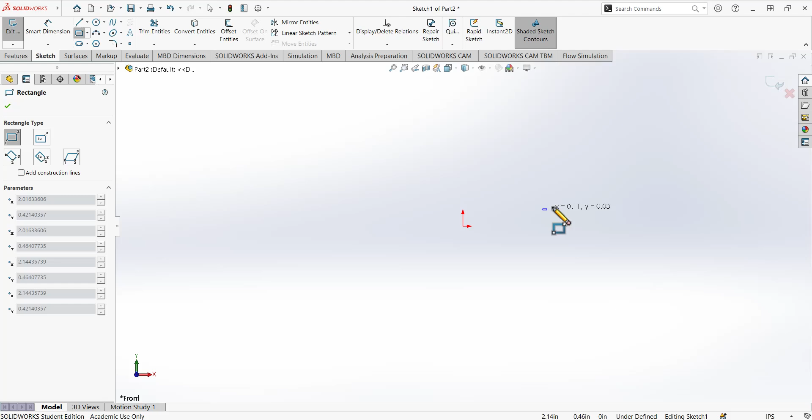First point here using right click, second point here like that, then click. Nothing is selected, so we have to add a relation. For this, I select this origin point and this line, then add the relation so it's at the midpoint. Now this origin and this line are in midpoint.

Next we add the dimension using the smart dimension tool. For this line we have a dimension of 5 inches, and for this vertical line we have a dimension of 0.5 inches. So this sketch is complete and fully defined.

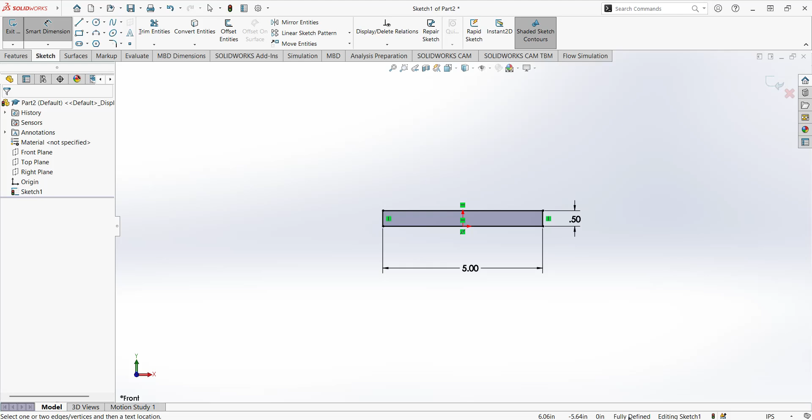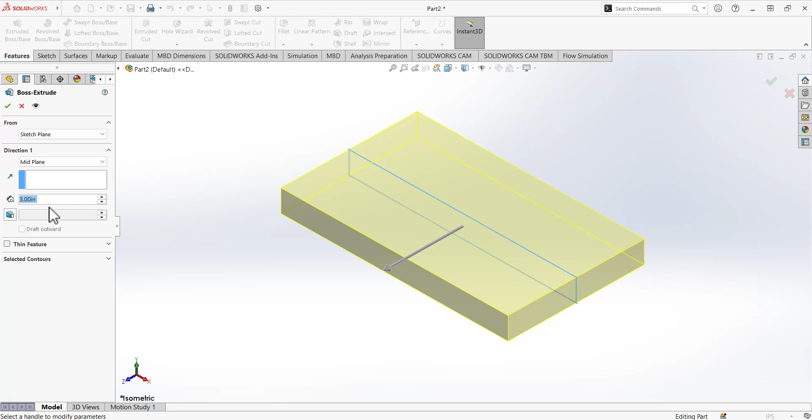Next, exit this sketch, go to isometric view, then go to features and extrude. Under the second setting, for direction one we select mid plane, and this depth of the sketch will be 3 inches. Now you can see we selected mid plane, so half of the material is added in one direction and half in the other. Total it's 3 inches.

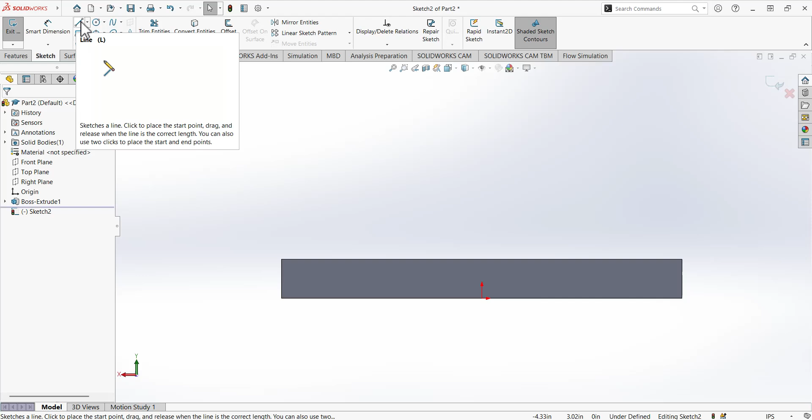Next we open another sketch, and for this sketch we select this face. Use the middle mouse button to rotate it and select this plane. Now for this sketch, select the line tool and draw a line from here to here, then move your cursor like that, then like that.

Then we draw a center line, like that, and move this point till this point. We are basically adding the half sketch like that. For this line, we can also just drag it and place it till this point. We add the half sketch and then use mirror.

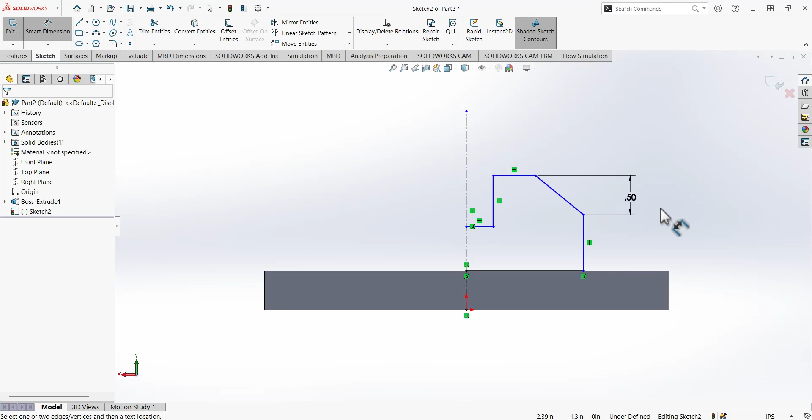For the smart dimension tool, we put the dimension. From here to here, this dimension is 0.5. Then we add the angular dimension. The angle between this line and this one is 30 degrees.

Next, from this point to this point in the drawing, the whole dimension is given as 3.25, but since we're adding the half, we divide it by 2, so it will be 1.625. From this point to this point, the full dimension is 0.25. Next, this dimension we put as 0.5.

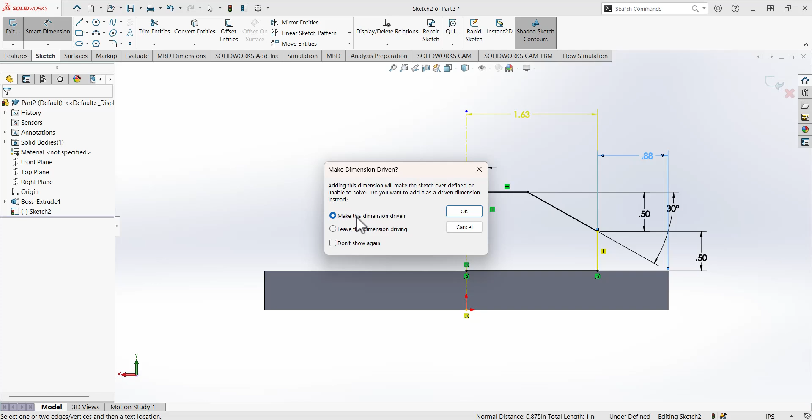Next we have to see which dimension is missing. One thing from this point to this point - it's over-defining our sketch, so we don't need that dimension, just cancel it.

Next we see the depth for this one, which should also be 0.5. We can add a relation between this point and this point, or add a dimension like that, and it's 0.5. Now our sketch is fully defined, we don't need any further dimensions.

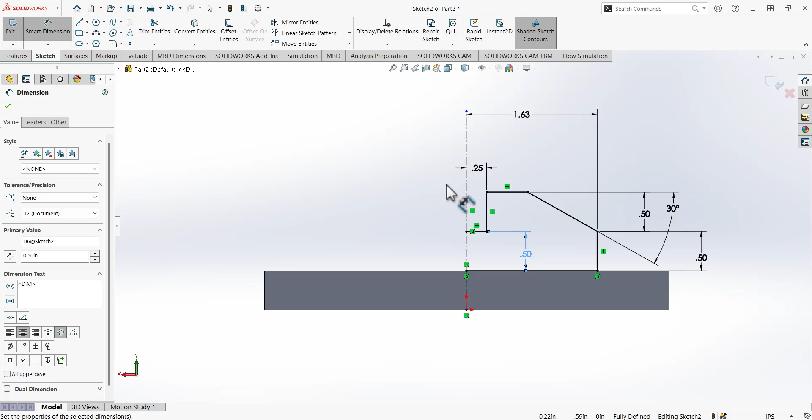Next, go to mirror entities. Select all the sketch lines you want to mirror, then under mirror about, select this reference line, so it mirrors around this reference line. Now our sketch is complete.

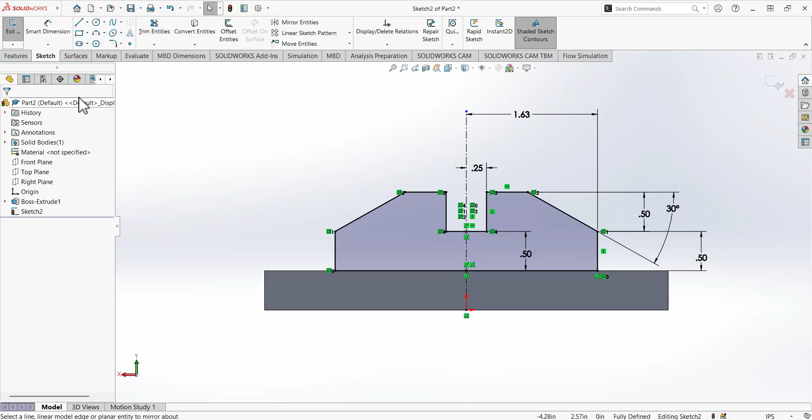Exit the sketch and extrude it. Go here to make it isometric. Again it's selecting mid plane, but we want it blind. Now it's going in this direction, but we have to change the direction, and the dimension is 2 inches.

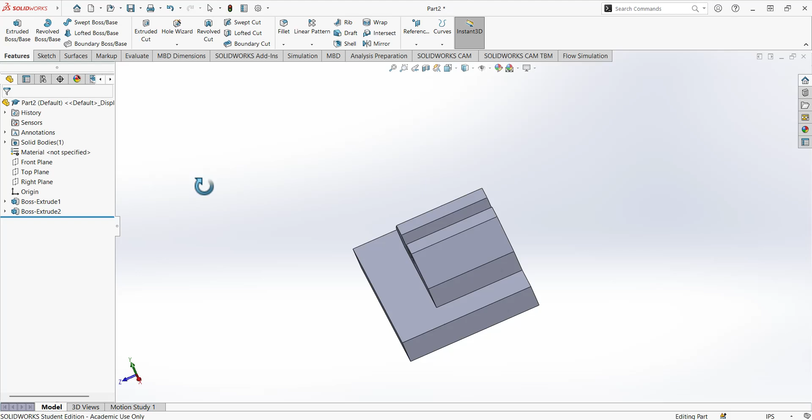Next we use the hole wizard. Go to hole wizard, then to hole type, and select this option for the hole. Make sure ANSI Inch is selected, and for all drills, the drill size we select is 1/4.

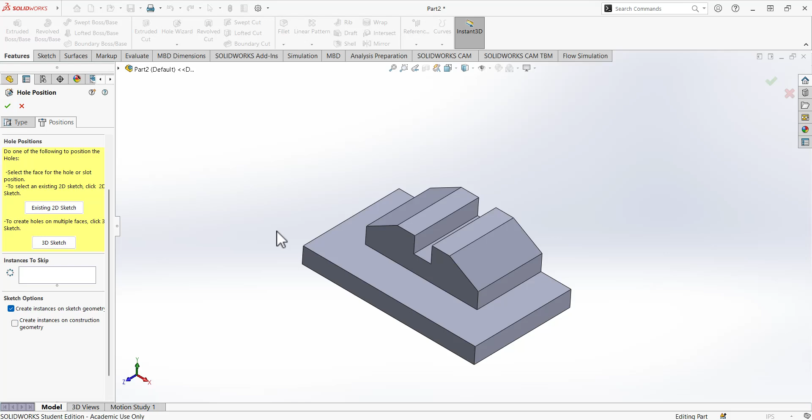Unselect it and go to all, then go to position, and here we tell on which plane we want these holes, and select this one. So place one hole here, one here, one here, and one here.

Then we dimension these holes. Select the smart dimension tool and put the dimension. From here to this point, this dimension is 0.375. For this dimension, from here to here we have 0.375. And also from here to here we have 0.375.

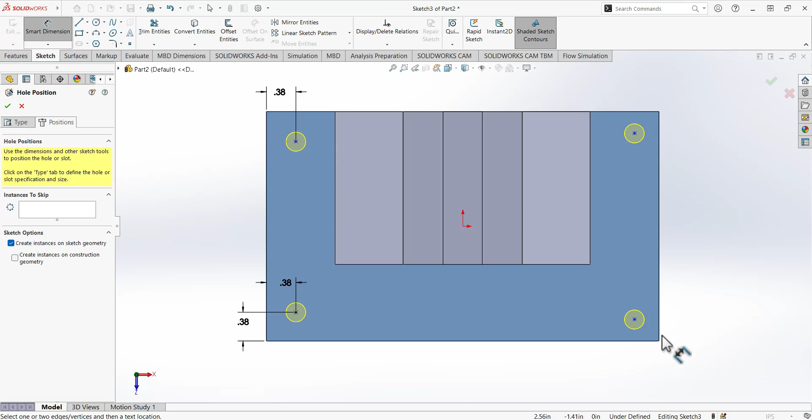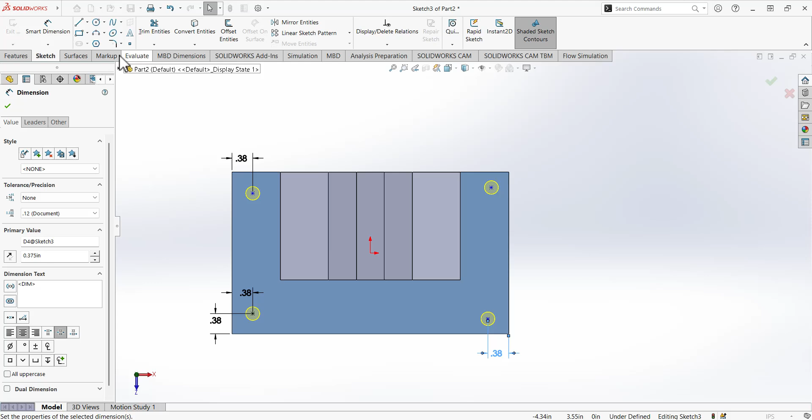Again we find the dimension between this line, it's 0.375. We have to define this as 0.375. And again for this circle, from here to here, this dimension is 0.375.

After defining this dimension, you can see it's underdefined, so we have to add some relations. Add a relation between this line and this line - these two points should be vertical. We put a vertical dimension for it. We cannot add this one, so we add the relation again.

Between this line and this line, we add a vertical relation between them. Then again add a relation between this point and this point - they should have the horizontal relation.

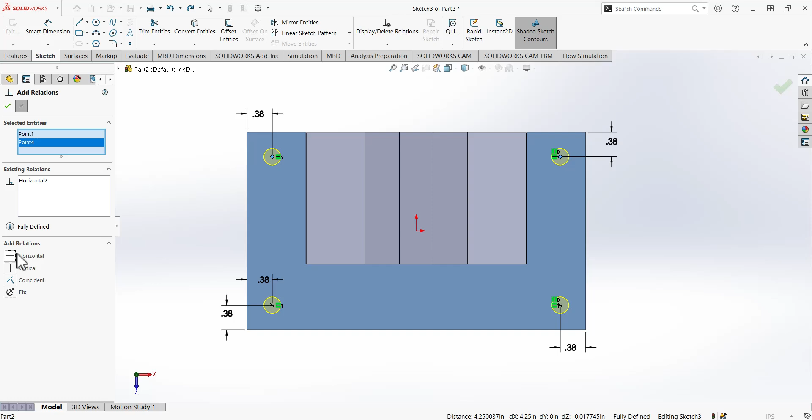Now only one thing is left to define. Add a relation, select this one and this one, and again a horizontal relation. So now it's fully defined. Check mark - now we have our holes with proper dimensions and relations.

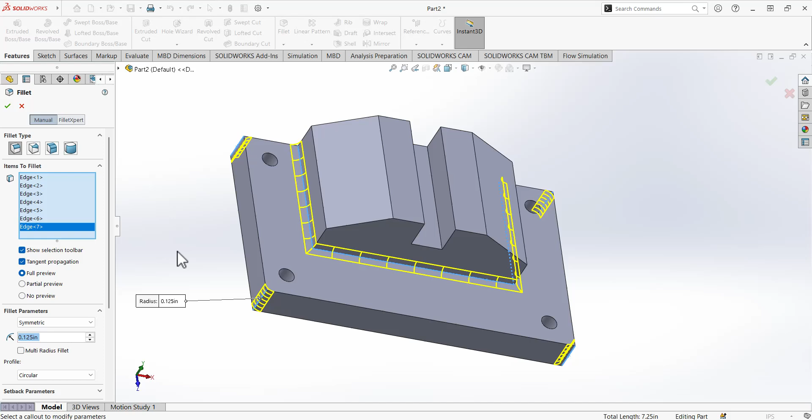Next we use the fillet tool, with a radius of 0.125. I select this edge, a single edge, then select this one, so it selects the four edges like that, and also these lines. We're doing the fillet in one command - you can also do it separately for this - then check mark.

Now our design is done.